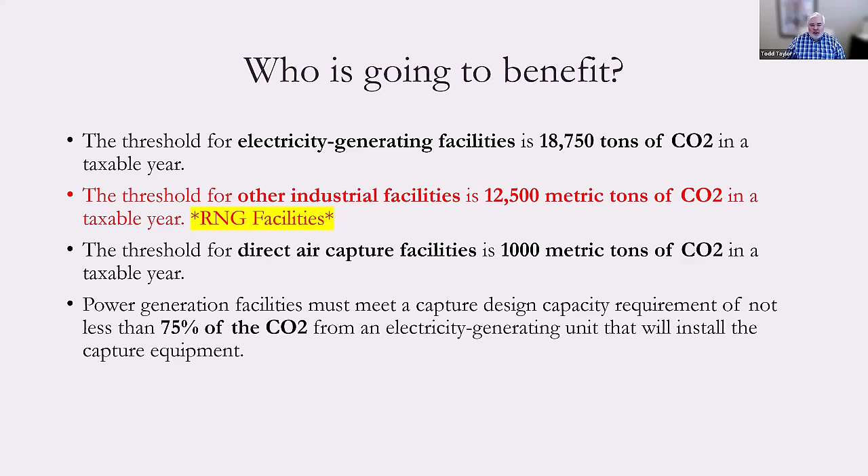And then I talked a little bit about direct air capture. That is a very new technology, very capital intense. They're obviously trying to incentivize that a lot with having such a low threshold for the CO2 capture. Not many projects doing direct air capture, and certainly not the topic of what we're talking about today.

So 45Q basics. Again, the IRA was a wonderful law that was passed, a lot of benefits to it. 45Q, already an existing law. What it did, the IRA increased the dollar amount per ton for carbon capture, storage, and utilization. So if you're doing carbon capture and storage in saline geologic formations from industrial, which would be RNG, and power generation facilities, then that's $85 a ton.

$60 a ton for carbon capture and utilization from industrial and power generation facilities. RNG facilities would fit there well. The RNG facility should really be at both the top and the bottom. Although sequestration in saline geologic formations really is geography dependent, about whether there's the appropriate geological formations available in your area, unless you're going to hook into a pipeline like Summit or similar pipelines.

But most RNG facility CO2 projects that I'm aware of are looking at industrial reuse, or they're going to connect with like a sustainable aviation fuel or some sort of low carbon fuel project that's separate from the RNG facility. Dollar amounts for direct air capture are obviously much higher. For that, again, they're trying to find ways to encourage this new technology.

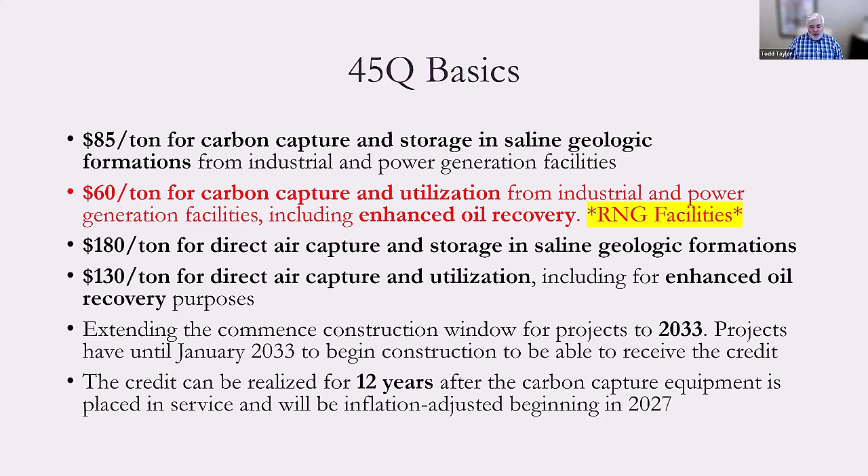for the credit. Now that assumes that you're taking the direct credit. If you're doing direct pay and you're a for-profit enterprise, you have 5 years for the credit for the direct pay portion of it. So just be aware of that. And we'll talk a little bit about that as well later on.

There's a lot of industrial processes that utilize CO2: hydrogen production, which is heavily incentivized under the IRA as well, sustainable aviation fuel, methane, or methanol, all of those are processes that use CO2. But there's a lot that goes into analyzing whether or not your CO2 in a capture and utilization scenario gets the credit. And there's this whole requirement for a life cycle analysis.

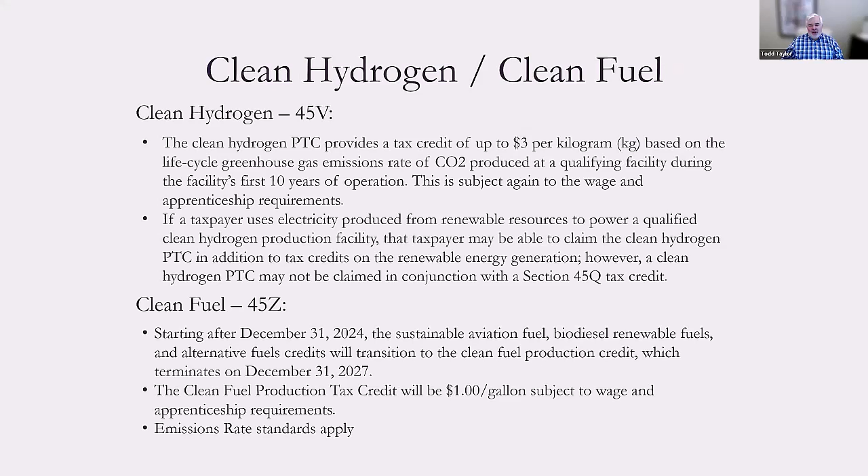A little bit about clean hydrogen and clean fuel that I added here only because I wanted to make sure that we talk about this. One entity is not going to be able to claim 45Q and at the same time 45V for clean hydrogen, or 45Z for the clean fuel credit. This is controversial, and I understand it because it's evolving, but until the rules are released, we're pretty much telling people treat the credit as attached to the molecule. So two separate entities cannot claim Z and Q or V and Q at the same time. Put aside any RINs, LCFS, anything else like that, right? This is just about the tax credits on the federal side. There are a lot of people spending a lot of time trying to figure out how you can separate entity structures to be able to do this.

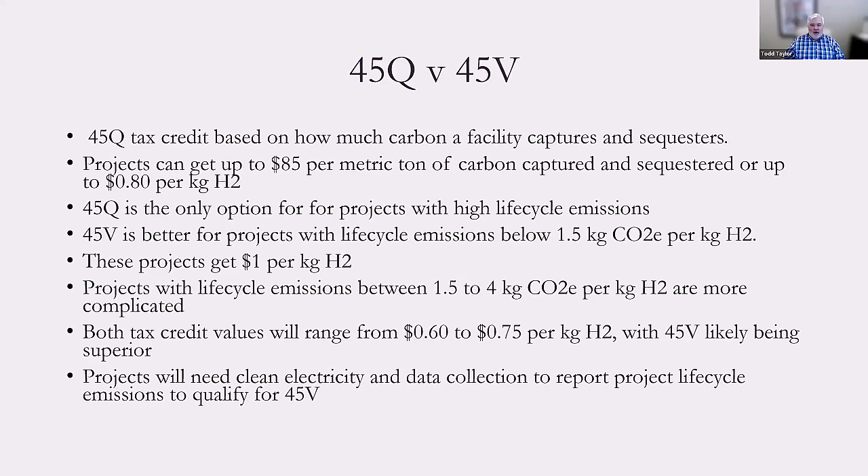All right, so 45Q versus V: if you're looking at a hydrogen project, do you want to go with the hydrogen tax credit versus the carbon capture credit? Really, it's a question of the size of the project. The V rules that have come out so far are very restrictive. And if your project does not have a very low life cycle carbon, then you are likely going to have to go with Q, just because you probably won't qualify otherwise. And then Z is a very short period of time. It may be extended; it's based upon the old biodiesel tax credit that was extended time and time again. But right now, Z is only going to last so long.

Everyone's assuming that Z will be more profitable than Q, and you can switch back and forth. But 45Q can be direct pay, which is probably better from a project financing, especially from a debt side, than not. There's some information about that.

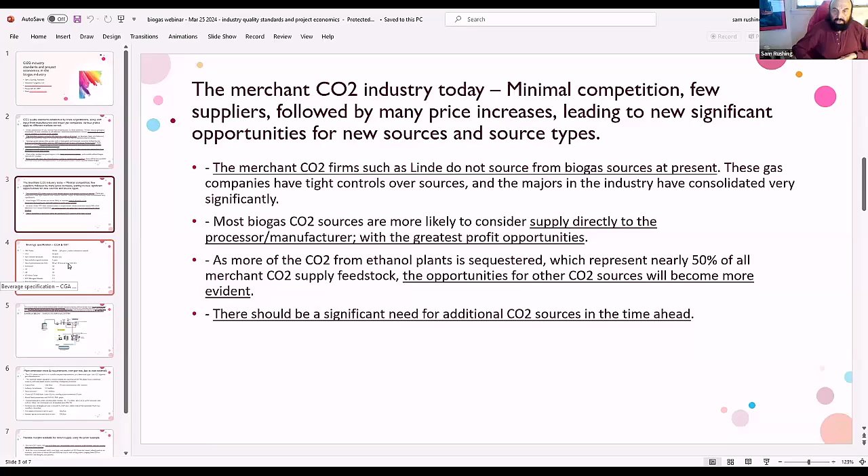And on the other side of the coin, if you're going to sequestration, you could get 85 bucks in some cases. So there's a need for significant new production from other source types in the future.

Now, I gave you a spec here. Both the Compressed Gas Association and the ISBT have defined CO2 purity or specification in this respect. CO2 purity calls for 99.9%. This is all ppm by volume, unless otherwise stated, such as for non-volatile residues. These are maximum values here, and this is a minimum value. So you can see oxygen, CO, phosphine, and so on are all defined. Of course, hydrocarbons is a big factor, and also sulfur.

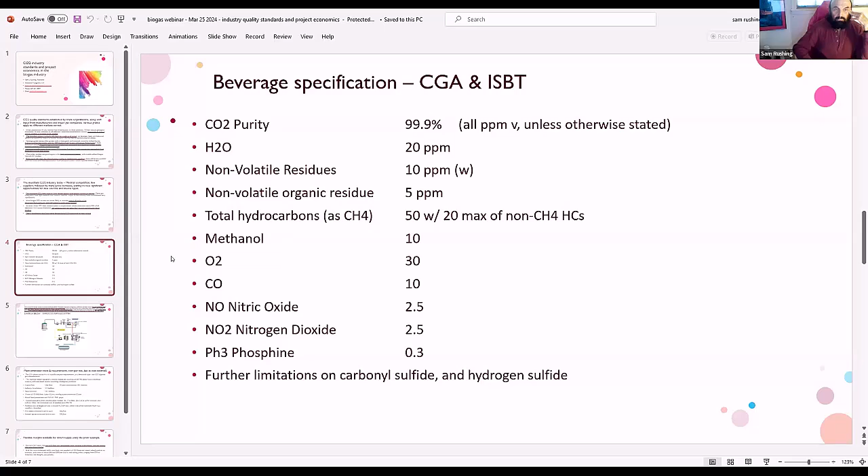I have a simple diagram here showing a possible CO2 process, say we're coming off the digester. We're talking about biogas. Up here we have a membrane, and then down here we'd have CO2 compression and activated carbon, filter and dryer. It's going to be saturated with water, that is the feedstock coming in, raw gas. Then refrigeration adequate enough to turn it into a liquid product for storage or process, or a pipeline, for example, or gaseous - and gaseous could be pipeline grade as well. Most pipelines run around 1,700 PSIG, something like that.

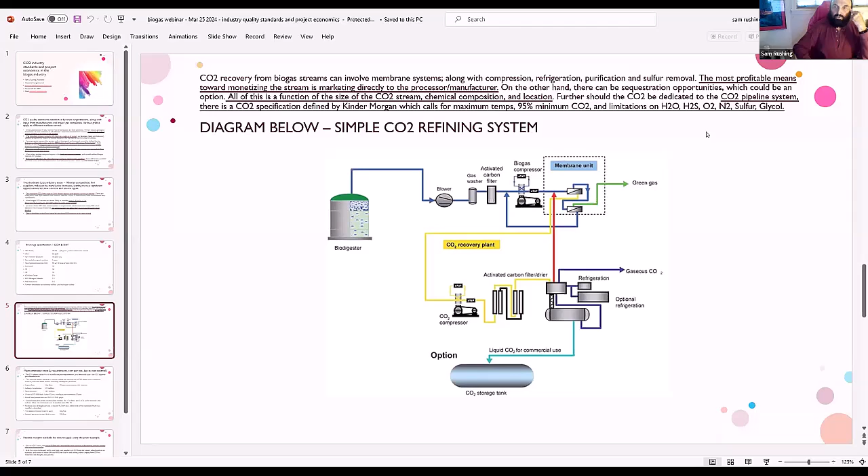As I mentioned, the most profitable way to monetize your CO2 is to sell straight on to the customer, manufacturer, or possibly some sequestration options. And speaking of pipelines, there is a pipeline spec defined by Kinder Morgan, among other majors, that I call kind of a public pipeline. It calls for 95% minimum CO2, with limitations on water, hydrogen sulfide, oxygen, and so on, to retard bacteria and rust.

I had a recent analysis that I produced from an 81 ton per day, actually 80 tons per day, chemical process byproduct. This is just an example of costs and requirements. The capital cost for this 80 ton per day plant was defined by one vendor as $3 million, using a 15-year amortization and 6% interest to yield this cost. Delivery and installation is about 40% of this value, which is a very standard thing.

When you estimate the laid-in cost for this plant of 80 tons per day from vendor number one, it's $4.2 million. Power, I used 6.8 cents per kilowatt hour, and it's about 140 to 160 kilowatt hours per ton power demand for these CO2 plants. Labor, I threw in around $3 per ton, and cooling water chemicals, $2. Grand total for production costs, FOB spigot for liquid, is $32.01. That's vendor number one.

Now, vendor number two turned out to be $6.27 million, and that's plus LO-CAT sulfur removal, which is an additional cost. All that stuff thrown together comes to approximately $53.10. So it's kind of a big difference right there, depending upon who the vendor is, where it's manufactured, and the raw feedstock content, the size, and everything else is variable. So all of this has to be analyzed for each location and each type of feedstock.

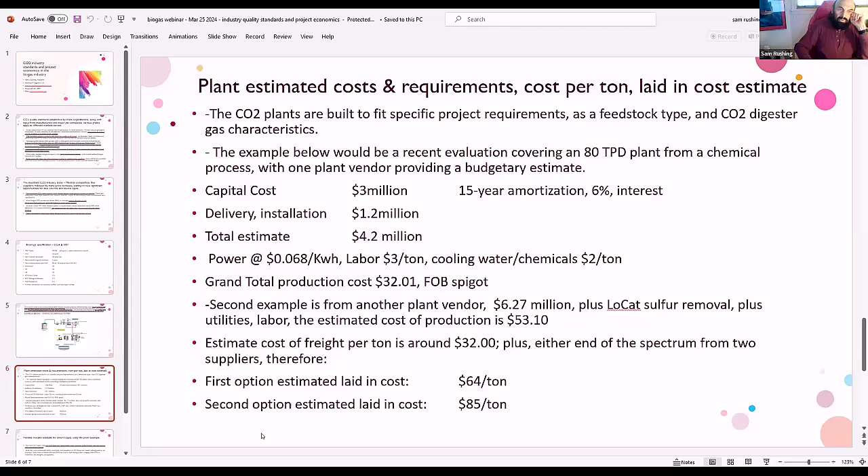So we're talking about margins from the commercial sector. Again, the costs will vary depending upon the feedstock, raw gas composition, plant supplier, and the size of capacity—all of those drivers. The two examples I used indicated the $64 and $85 laid-in cost. By the way, $70 to $100 per ton is a common value to sell to the big processors—say, a food processor like Tyson or someone like that.

If you're sourcing from cow manure or chicken manure or something like that, these guys are very open-minded in terms of buying product. There's also a huge amount of dry ice used in the poultry industry and in the beef industry. That's $70 to $100 per ton for the big customers like that. These guys are 5,000 tons per year per plant, typically you just sell a part of that, of course.

And then for the small guys that are like 500 tons a year, that would run anywhere from probably $100 to $300 per ton. These are little accounts, but if you piece together a good market to sell into, the margins could be significantly better. Sequestration value was mentioned by my predecessor—he's the expert on that—but it's up to $85 per ton. It's a great way to monetize, but you have to pay for the capital equipment. That's the other factor to consider.

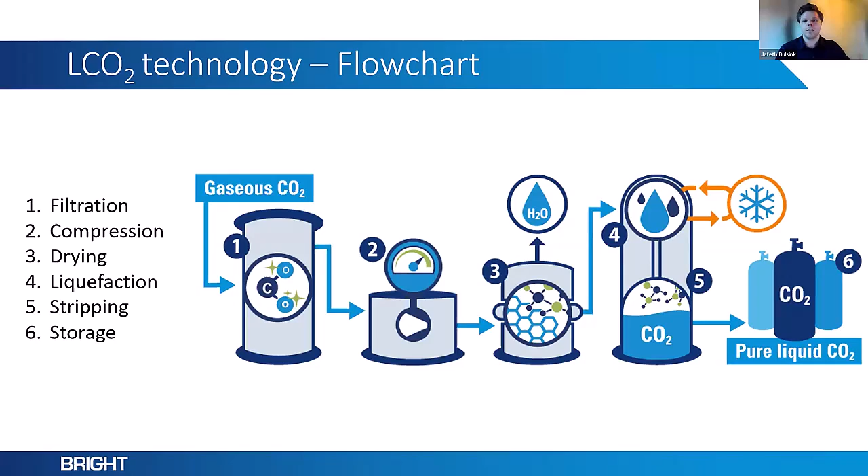From there, at the bottom of the stripping column, the liquid CO2 is then pushed into tanks. We supply all kinds of different tank solutions—horizontal, vertical, and in a lot of different sizes.

These are, except for the concrete industry, quite known industries that use CO2. A lot of concrete technology is also being introduced in the market right now, where we see a big market coming up, where our clients can bring the CO2.

And the future utilizations are, as a few examples, sustainable aviation fuels, e-methanol, and e-methane. There we also see bigger markets coming up for decentralized use of CO2.

The technology that we sell is developed in-house, and we have our own anaerobic digesting plant in the Netherlands that we own and operate, where we tested the complete system. We're unique by using CO2 as a refrigerant, so no freon or ammonia—especially in Europe, maybe even more so in the Netherlands. It's good to have that, because freon or ammonia are bound to quite some regulations, also on the permitting side, for instance.

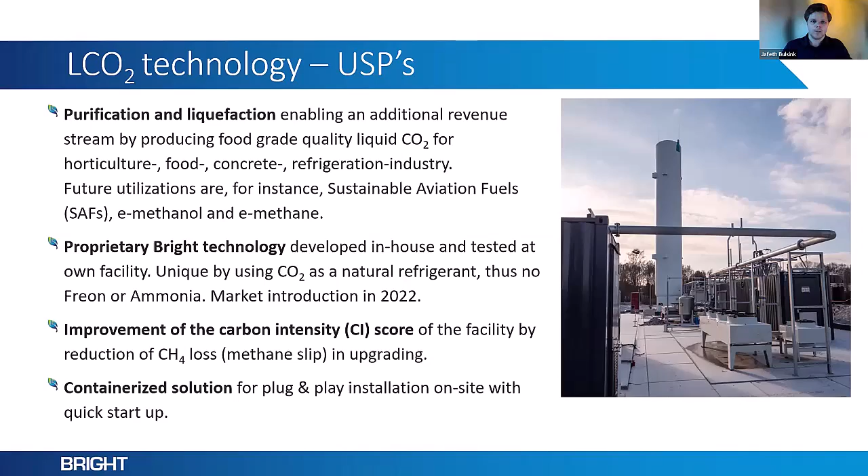So the advantages of the system, like I already said, it improves the CI score, the lower environmental impact, but also better methane pricing. That's something that's maybe interesting to slightly mention here. I'm presenting it for the US here, but for instance in Germany, there's a link between the CI score and the price of your methane.

So you can get a higher price if you have a lower CI score, which means that installing a CO2 liquefier at the back end of your upgrading system is quite a good investment, because you earn a lot of it back through your methane sales. Reduction of methane slip, like I said, and the extra source of income from the sale of liquid CO2 also.

And what you also see in Europe—I haven't seen it in the US yet—is sometimes a need for adding a thermal oxidizer at the back end of an upgrader to burn your methane. That's not needed with adding a CO2 liquefier, so no methane will be emitted into the air.

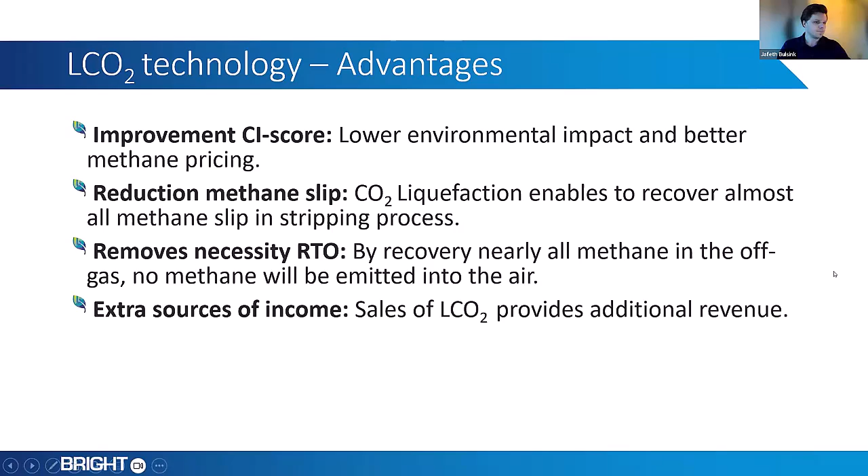The product range that we are offering, I put it also in line with the tons per day that I saw in another presentation just now. We have a very small one, the mini, 300 to 600 kilograms or 7 to 14 tons per day, metric tons per day. That's really a small one, equivalent to a system of approximately 200 SCFM of biogas at the lower end.

Then we have the compact range, 800 to 1200 kilograms per hour, so 19 to 29 tons per day, all fitted still in a 45-foot container with a separate reboiler skid, that's the stripping column. That's the 800 kilograms that fits behind the 500 SCFM biogas upgrading system. That's the one that we've built most up till now.

That's I think also a little bit of the lower limit, as already there was already a question about it, but the lower limit to start with. At least 800 kilograms per hour of CO2 has to come out of the upgrader to make it really interesting. But bigger is always better because the investment of the system doesn't go linear with the capacity.

Then there's the medium range, 1500 to 4000 kilograms per hour. We install it in a 40-foot and a 20-foot container, so the compressor will be installed in a separate container. And then we have even the bigger. So the medium is also still a good one to fit behind the biogas upgrading system.

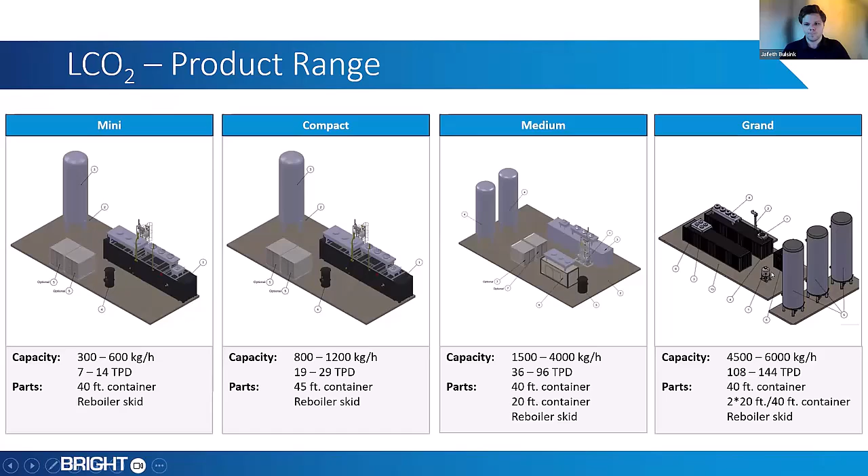The references that we have installed up till now: we have a really a bunch of them still in Europe. Multiple in the United Kingdom, or to come. 5 in the Netherlands, multiple in Germany, especially because of the incentive there. We have one that's built for the US.

That's already built last year, it will go to site hopefully later this year. And that's also the focus that we see now, that the US will also come up with more and more CO2 liquefaction projects.

And that's also, like I said before, we have 200 references on all the technologies together right now, of which approximately, I think, 170 are in Europe, 30 of them are in the US. So that's a little bit of the split that we have at the moment, mainly biogas upgrading systems.

So with the boost that's coming in the US, I really see also a market coming up on the CO2 liquefaction side. But it's like the previous presenter said, it's really a fine line between where your system is, how big it is, the location, is there a CO2 shortage or a high demand of CO2 in that region. So you really see that's also in Europe, that's really an important part of it.

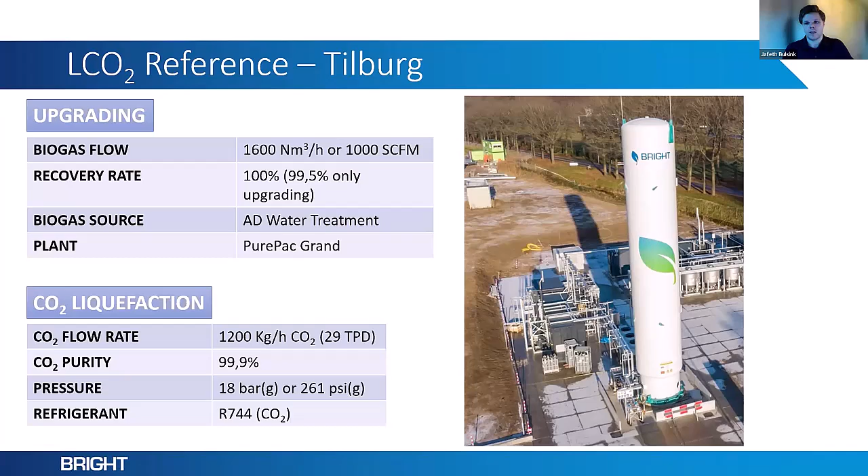We did a check, there was a sample made of the liquid CO2 a few weeks ago, where the laboratory tested it on what kind of quality it was, and it was above the food grade quality that was requested by our client also. That's what you see by adding the right steps of activated carbon, plus also the stripping column, really means that you can get a high quality of CO2 coming from a biogas source.

Then a project in Heek, in Germany, same sizing, also a 1000 SCFM system, although a bigger CO2 liquefier at the back end. That's typically because in the Netherlands we have low caloric gas, less CO2 to get out of the biogas. So in Germany it's higher, so there we see we could fit a bigger system. Also the same purity is reached.

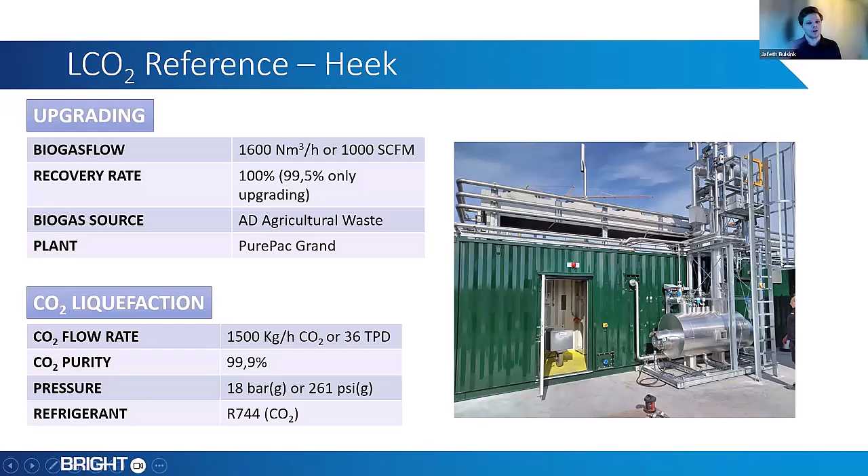So there was an agricultural waste AD plant. And in Helmstedt, also in Germany, it's a little bit of a smaller one, a 17 tons per day CO2 liquefier behind approximately a 470 SCFM biogas upgrading system. And here you see the tank being hoisted on this place. It was a very big tank, 90 tons storage, so 20 meters high.

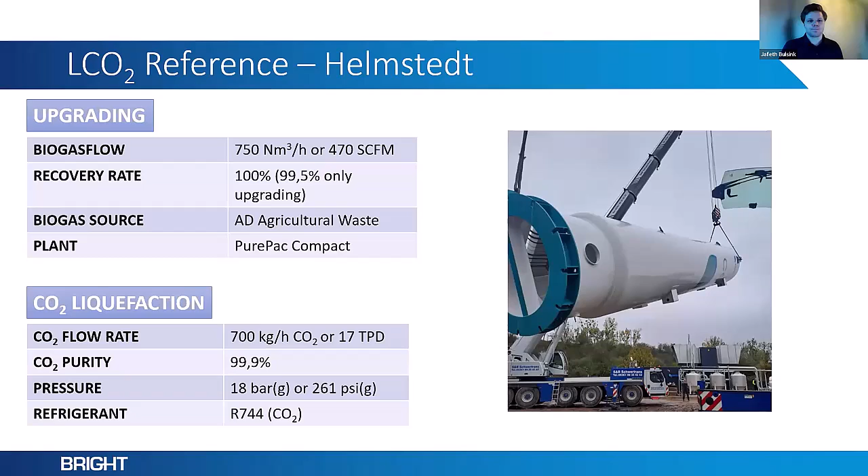That was it for now. Thank you for your attention, and my email address is at the back end of the presentation if anybody has any questions regarding this presentation.

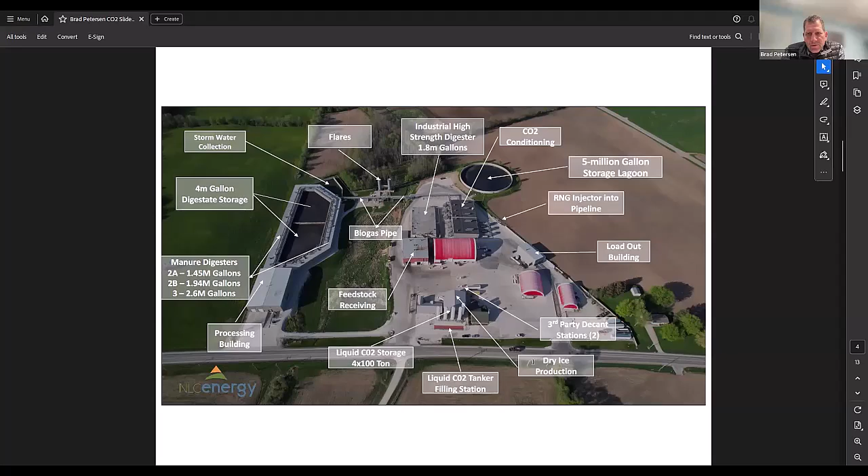So today we really pride ourselves in this, it's not an easy thing. When we took this site over, it was actually shut down at the time. It had been shut down for a couple of months, which was in early 2019. Since that time, in turning it back around, we've had no foaming events, nothing significant, and continued to produce for the LCFS as well as do these different services: decant, LCO2, and dry ice.

So go down to the next. This is interesting in this regard, because in November we announced this carbon dioxide management agreement outside of Bakersfield, California, where we will be sequestering just over about 230,000 tons a year of CO2 into the oil fields on the Elk Hills site, in a new carbon park that they're building. We've announced that and are proceeding forward. We intend on getting through FID by Q3 or Q4 of this year and building that facility out.

So more specifically, let's talk about CO2. Why don't you go to the next one? I'll give you my 2 cents on it. Number one, and I think Sam actually had a lot of good input. I would say most of my input aligns very much with his. Number one is don't let the tail wag the dog.

So every day, our number one goal is to maximize methane production. And when you start selling LCO2, then your customers just want you to focus on that regardless. And when you have to shut down the plant to clean things out or to do some maintenance on it, it has to be very specifically focused on CH4 production. And you're not there to actually appease your CO2 customers.

Customers want consistent supply. So what we've found is it does vary, just as methane kind of varies depending on the feedstock, specifically not so much on the manure side, but certainly on the food waste side, you have to be very consistent. Sometimes CO2 can come out at 22 tons a day, and sometimes we've had it at 35 tons a day.

All that, once you start supplying to a customer, they want whatever it is that you've committed to. And you can't just say, hey, this week we're down for a week and next week we'll be back, and I need you to take this. And they just want to be able to contract for what they want going forward.

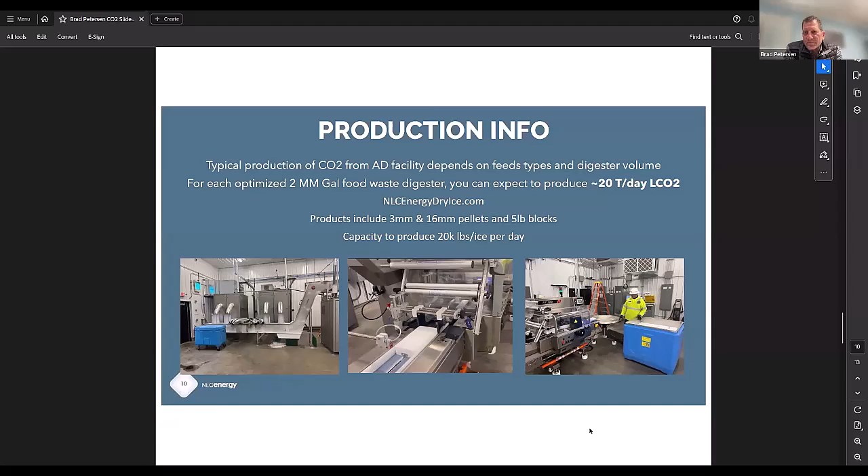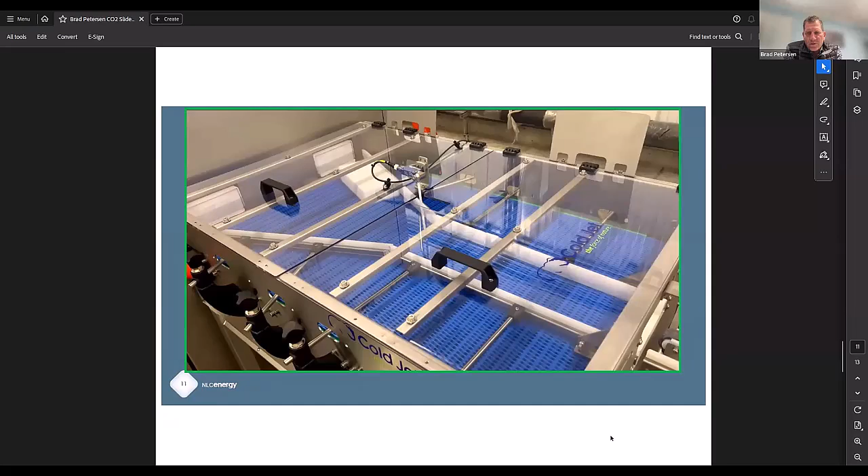It's just showing the 5-pound blocks going through. Pretty straightforward. We contracted with Cold Jet to be able to do that. So, my key takeaway is do your homework on the market specifically. Make sure that it's really something you want to get into, validate that there is inherent demand in that market.

We've already indicated that the PTCs, it's unlikely that you'll qualify for that. I mean, you actually have to do a fair amount, more than we are, and we're producing 30 tons a day, in order to qualify for the PTCs.

I think Sam alluded to the fact food grade certification is much easier than beverage grade certification. So if you don't have to, and if there's sufficient demand in the market, you could take on just that. And from what we found so far, there's not a significant difference in the pricing anyway. At least the sales price of it, but on the compliance side, it's much higher.

Proximity to potential customers is imperative. Trucking costs, also alluded to, $30+ per ton. And sublimation, I mean, if you're doing dry ice, it dissipates over time, and so you can't truck forever.

And it's not, in my opinion, right? It doesn't lower your CI score. I mean, you're just taking it from one form and putting it back out into the atmosphere in another form. So, maybe it does a little bit here and there through the process, but it's certainly not a carbon negative process.

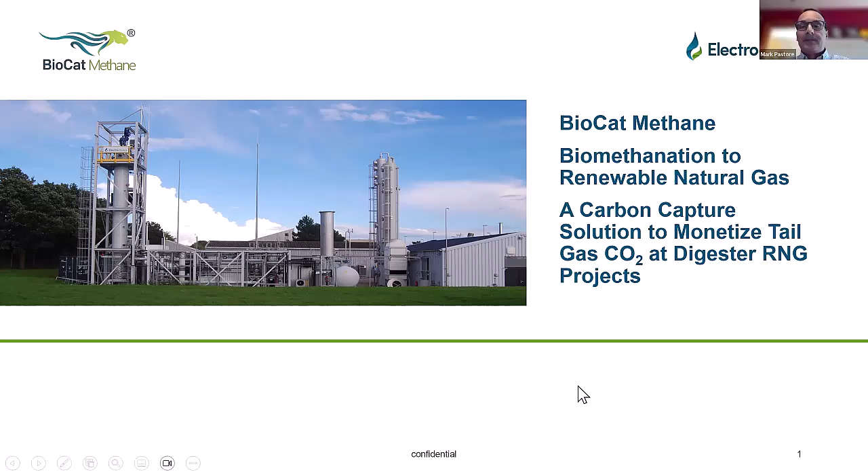So Electrochaea is a Cleantech 100 growth stage company. We've been around since 2010, and our technology combines CO2 and green hydrogen to create BioCat methane, which is a pure renewable methane. And the value that we create with this, and will create for you, is that you can store renewable energy, you can recycle and get a revenue stream for your CO2, and all this will help to decarbonize the gas grid.

We've so far had 3 successful projects, one in Denmark, one in Switzerland, and one in the USA with NREL. These were all commercial scale pilots, and the project in the USA at NREL is currently being moved to a dairy site in Maine by Summit Utilities, and we're real excited about that. And we've raised over 75 million euro to date from various strategic and financial partners, including Baker Hughes, ENGIE, and others. And we are in the process of scaling up to our 10 megawatt and 75 megawatt archetype designs.

We refer to our plant size by the size of electrolyzer capacity, just so that's not confusing to you.

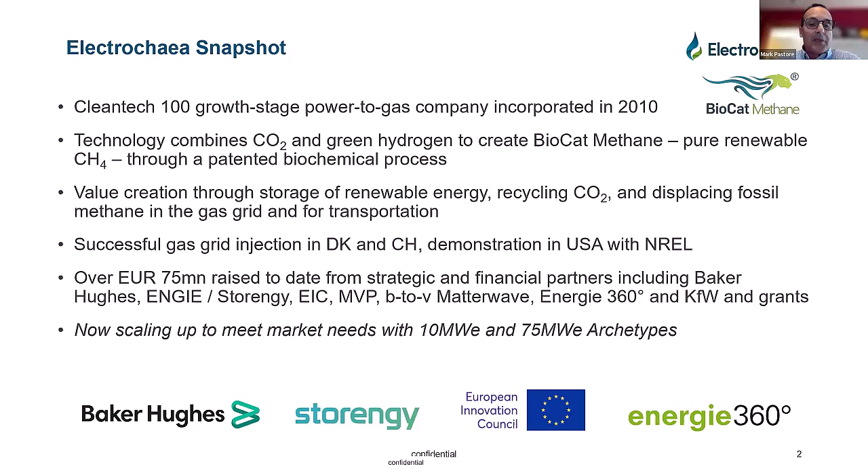So what is this carbon capture and utilization using methanation? Biogenic or waste CO2 are value-added feedstocks, and they could be used to produce methane or e-fuels. Hydrogen is also a growing business across the US and the world right now. However, accessing that market will require significant infrastructure development and may take many years.

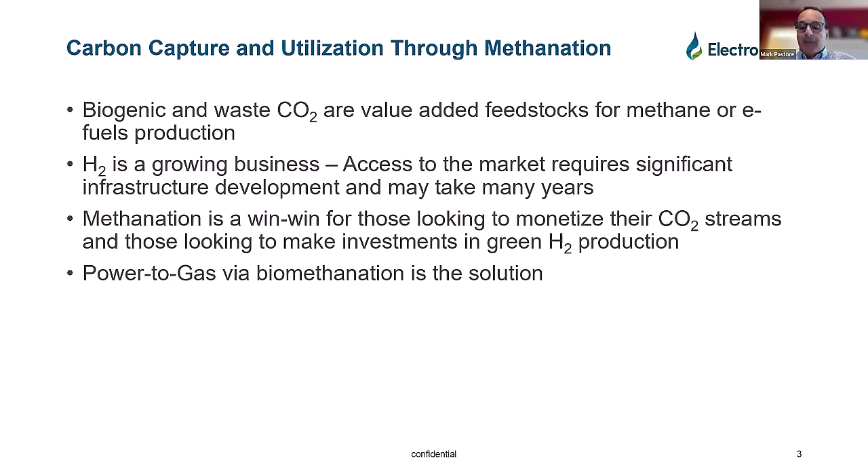So what we're offering here with this methanation process is a win-win: for those of you looking to monetize your CO2 stream, and for those investors looking to get into the hydrogen space, particularly green hydrogen. Power to gas via biomethanation is the solution to that problem. And I'll explain what power to gas is.

What this means is you're taking power, which in this case would be green electrons coming from either wind, solar, hydro, or other green sources of electricity. That's the power side of the equation. Then we look at the sources of CO2.

Here we have anaerobic digesters for biogenic CO2: dairies, pig manure, poultry. We have wastewater treatment plants. We also have landfill gases that could be used here, and in industrial space, fermentation processes, ethanol plants, breweries, food production, and then the harder to decarbonize sectors like cement, lime, or steel production.

So you take that source of CO2, add it to the power, and then through the biocat methanation process, you create a synthetic natural gas. This has a couple of different names - you probably hear it referred to as e-methane, or you might hear it as SNG. Whatever the case, you're essentially storing the renewable energy in the bonds of methane.

In that carbon-hydrogen bond, you have that renewable energy. Therefore, you can consider this in a way like a long-term energy storage solution. And the ultimate goal is the hydrogen, which you're making and would be very difficult to sell on its own, now gets to go right into the existing infrastructure of the natural gas grid. So power to gas is that combination of green energy and CO2 to make a renewable gas.

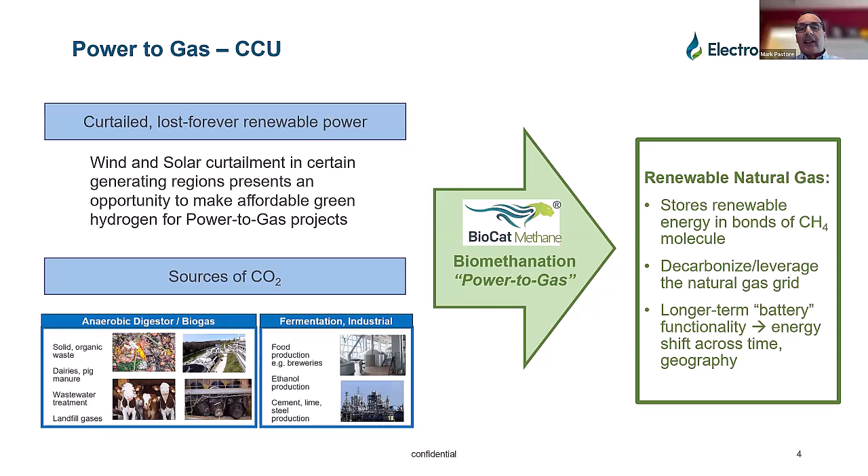How do we do that? What we're doing here is using a biocatalyst that's part of the domain of archaea. It's a 3.5 billion year old single cell microorganism that we've evolved to produce this hydrogen and CO2 reaction instantaneously in our reactor. In this case, we're taking electrolysis to split water, and then we take the carbon dioxide: 1 mole of CO2 plus 4 moles of hydrogen yield 1 mole of methane and 2 moles of water, plus heat.

The nice thing about having this heat being released is it's also released from the electrolysis. It's 150 Fahrenheit hot water, which can be used to warm the digester. So there's really good synergy in that we can utilize the heat and make the process more efficient. The methane is synthesized in each cell of that biocatalyst, of which there are trillions of them in the actual reactor.

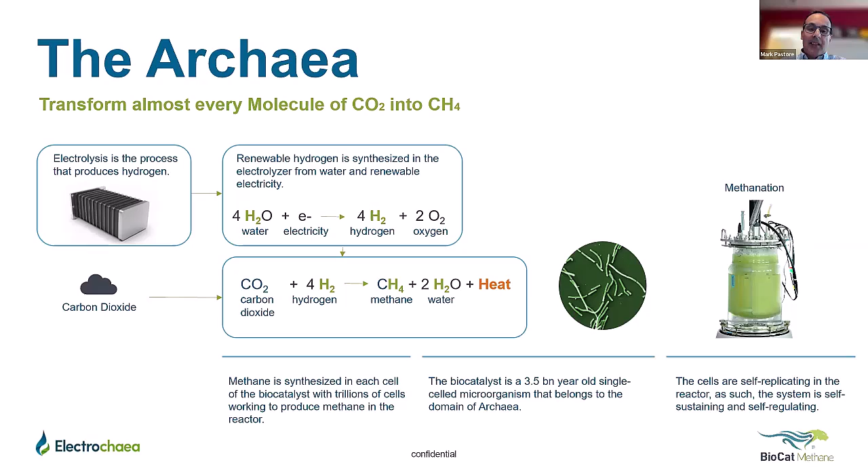And what's great about this biological catalyst is the cells are self-replicating, so it's a self-sustaining and self-regulating process. It's a simple, scalable design. Unlike other types of methanation plants, this is really just, I'd say, a hot water vessel with agitation.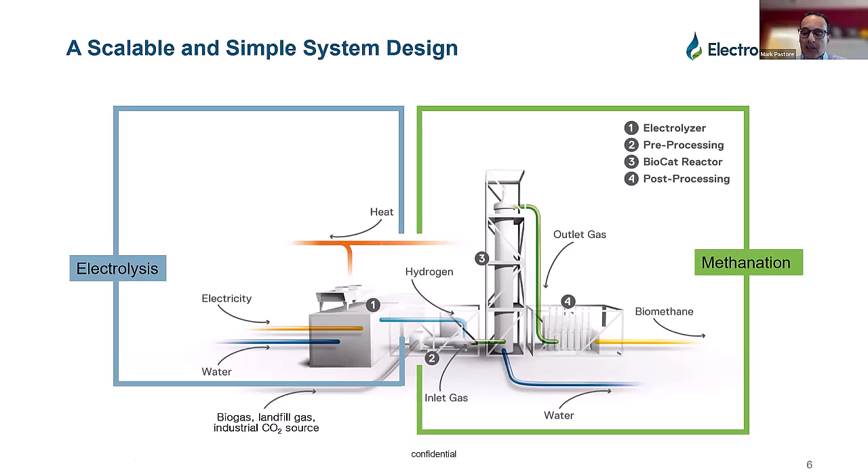Looking at the unique features of the technology, again, it's a unique biocatalyst - it's a patented strain, extremely robust. I like to say very efficient, flexible, and responsive. This is all really important, especially when you consider what's happening right now with the IRA and the 45V regulations that Todd spoke about earlier.

Now that we know we have to load follow, we have to hourly match, this reactor is highly flexible, able to turn down to 20% of capacity. So therefore, we could easily follow the load of an electrolyzer. Once we turn this down for days or weeks at a time, nothing would happen. As soon as you feed it hydrogen, CO2, and nutrients, it will immediately come back to production within seconds and minutes. And we've tested this robustly in the field.

It's a selective process. It makes 100% methane at 98.5% conversion efficiency. There's no intermediates. We can take pretty much any quality of CO2 coming in. The only thing the reaction doesn't like is oxygen. So you don't have to go through a lot to clean up. You don't have to compress the gas. We can take it right off the reactor. And it's a simple process, 65 degrees C and about 10 bar.

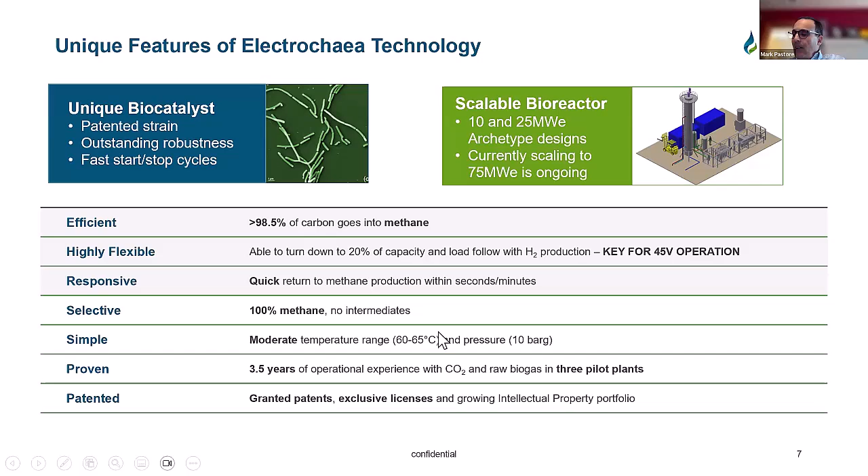Where we are in our process here for design, we've done our pilot plants, and we just completed our 25 megawatt reactor design, and we're ready. We have process design packages that could go to EPCs right now.

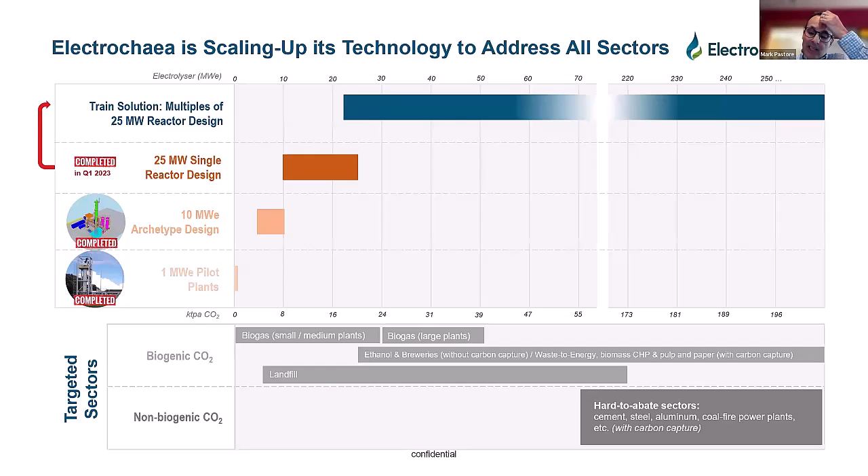Just quickly, our business summary, what we do for you: we will give you a long-term use for your CO2, which will provide a revenue stream. We license our technology to our partners and our owner-operators so we can generate value for you through the sale of the BioCat methane, which is a low CI replacement to fossil gas.

Very important, like the other presenter said, location is everything. And same here. The ideal site would have a biogenic CO2 source. We would have a power and gas interconnection in place, preferably in regions where renewable energy is priced well. So we're talking about the Midwest, the SPP grid, the ERCOT grid in Texas, MISO. And we support the expansion of our business models and regulatory policies that recognize the value of low carbon methane.

Looking quickly at the e-methane market, it's a strong market. We see that it's growing. There are financial incentives from the IRA. We can stack certain credits. We could get potentially an investment tax credit, as our system would act as hydrogen storage. We provide a solid offtake market for investors in methanation projects, strong interest from natural gas utilities with decarbonization goals, and also from the voluntary market, of which we can sell into our attributes. Really, interestingly enough, we're looking at potential sales into European and also other North American markets.